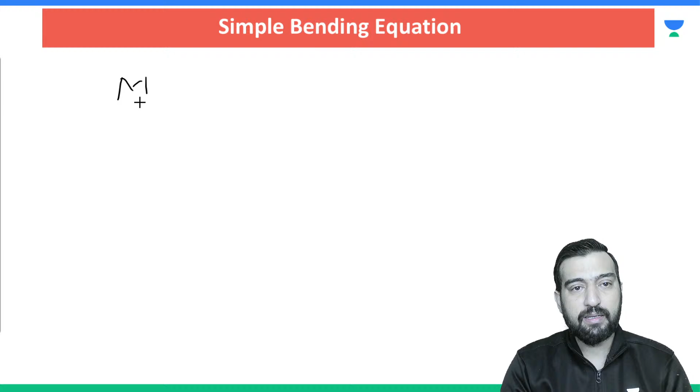We need to figure all this out, but before proceeding further I would like to start with the assumptions involved in this simple bending equation. So shall we?

Let me write down the assumptions once. These assumptions will largely remain valid for torsion as well. Let me write down the assumptions for you guys.

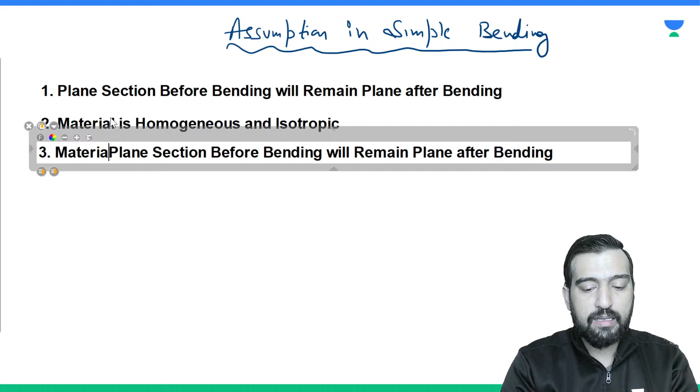Third assumption is that your material is going to obey Hooke's law. Material obeys Hooke's law.

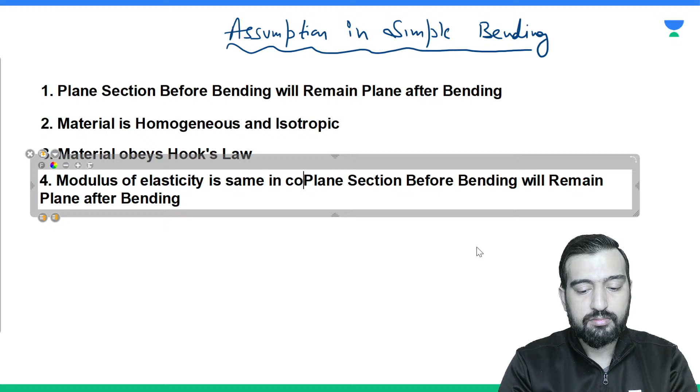Fourth assumption is that material is the same in tension as well as in compression, meaning its Young's modulus is going to be the same in tension as well as compression. So we can say the modulus of elasticity remains the same. Okay, so this is the fourth assumption.

So what is the fifth assumption? That initially the beam is free from initial stresses, or it is initially straight, and the dimensions of the cross sections do not vary along the length of the beam. So let me write it.

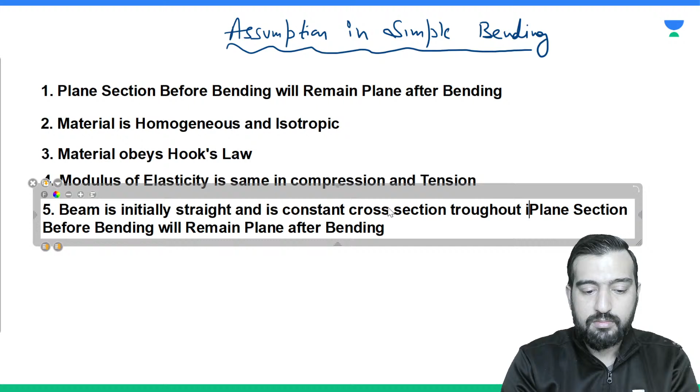And the next assumption is that the plane of loading must contain the principal axis of cross section. This is also the last assumption we can write. Very good morning dear Manjeet, how are you?

Next assumption is that the plane of loading must contain a principal axis of cross section of the beam, and the load must be perpendicular to the longitudinal axis of the beam. Okay, so all these are the assumptions which we are drawing.

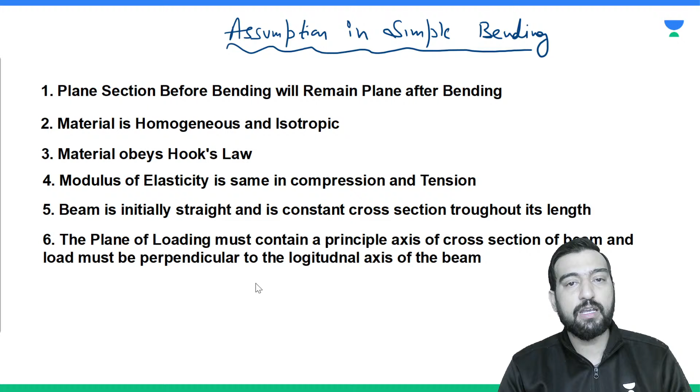Very good morning. Okay, so these are the assumptions we use before the derivation of the simple bending equation. Although I am not going to derive it, we need to understand it and be familiar with all the terminologies. So once again, plane section before bending will remain plane after bending simply means that the strain diagram is linear.

Second assumption is my material is homogeneous and isotropic. It is homogeneous, it is uniform, and it is going to show similar properties in all directions. This is the meaning of homogeneous and isotropic.

Third is that I can work linearly, meaning it obeys Hooke's law, meaning strain and stress are directly proportional. From assumption 1, the strain diagram is linear, and since it obeys Hooke's law, stress is also directly proportional to strain, meaning the stress diagram is also going to be linear. So this is my third assumption, which indirectly says that the stress diagram here is also linear.

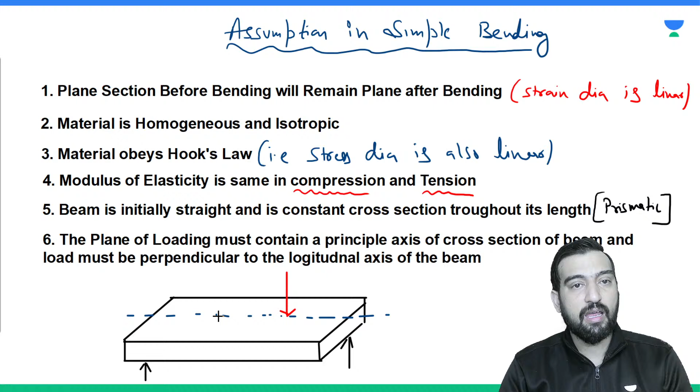So now by keeping these six assumptions in mind, we can derive the simple bending equation. Although once again I am repeating, yes, prismatic section means no changing of area. Manjeet, excellent, yes. But again I am saying I am not going to derive the simple bending equation here. This is the equation which we have to use, which we have to apply, on which we have to do our engineering. And believe me, once again I am saying this equation is literally very important.

Now we need to understand what all are the various terms involved in this simple bending equation: M upon I is equal to sigma by y is equal to E by R. What is M, about which axis it is happening, what is moment of inertia, about which axis we calculate it, where stresses are developed, what is y and from where we measure it, for which material we talk about Young's modulus, for which direction we seek it, and what is this R, this radius of curvature, and what radius actually comes into the picture. So we need to understand this simple bending equation.

So let me explain these six parameters one by one to you. Let's look at these six, one by one. But these assumptions are very important. These assumptions are very important.

Now let me again write down this simple bending equation: M upon I is equal to sigma by y is equal to E by R. If you get the visualization of all the terms of this equation, then the simple bending equation will be nothing for you.

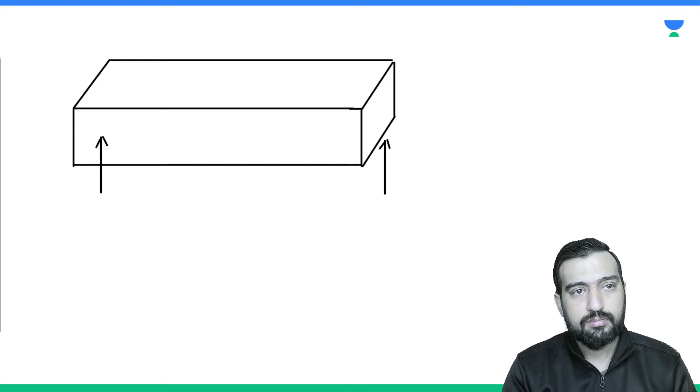Or let's say it is simply supported condition. Now all of you know what is a simply supported condition. Let me draw it over simply supported condition. Okay, let's say this is a support and this is also the support.

And you have to apply load here vertical axis. You can apply load here in two ways. One like this, another like this. Both are going to work well. मतलब कि इसको मैं आपको कैसे समझाऊं कि अगर ये मेरा बीम है तो आप इसमें ऐसे भी लोडिंग लगा सकते हो, ओके, ऐसे भी लोडिंग लगा सकते हो और ऐसे भी लोडिंग लगा सकते हो.

इट कैन बेंड लाइक दिस, है ना, ज्यादा नहीं करूंगा टूट जाएगा वरना. और इट कैन शो यू बेंडिंग लाइक दिस. सो इन बोथ द डायरेक्शन यू कैन शो द लोड, क्योंकि दोनों के कारण बेंडिंग हो रही है. बट यस, इफ यू आर गोइंग टू अप्लाई लोड लाइक दिस, so it is your torque. Due to that, twisting will happen, which is our next topic, and we do not have to consider that here.

Okay, so for bending with respect to this beam, we would be having two possibilities. About this axis it is going to bend like this, about this axis it is going to bend like this. But if you are going to apply load like this, it is simply going to give you compression, and if it is passing through the CG, it is simply going to give you compression or tension. It is not going to participate in bending.

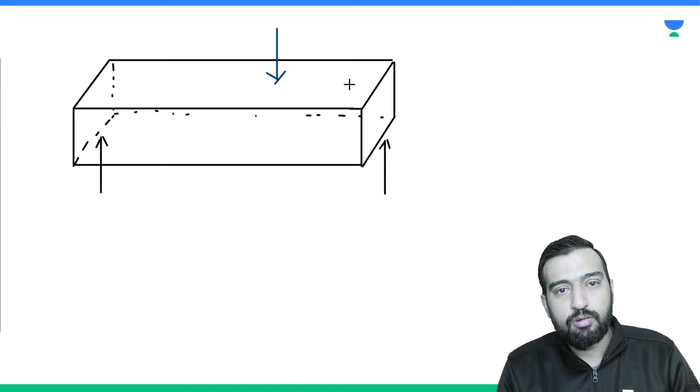Okay, so that is the case. So what can we do? Let me start with this vertical loading. So this loading must be passing through the center line, which contains the loading. It must be passing the center line. Let me say like this. Okay, this is the center line.

And why center line? Because if it is going to deviate from this center line, then along with the bending, it is also going to show you some twisting. For example, if I am going to take a load like this, then due to this eccentricity, instead of bending, it is also going to give you some torque, some twisting moment is also there. Suppose this is P, then P into E is the twisting moment about this axis.

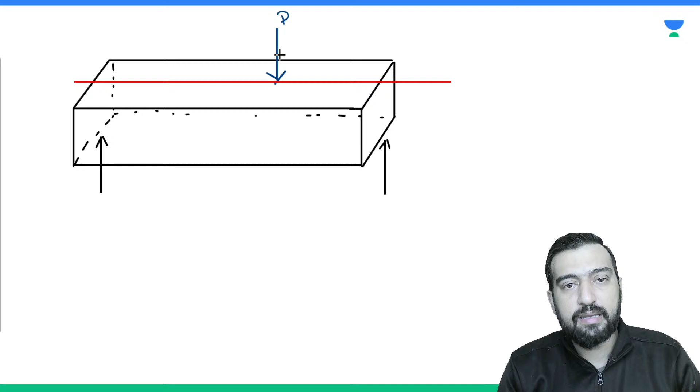So right now we do not want to tackle twisting problem. We only want to tackle bending problem. Okay, only simple bending is involved here. Or simply you can apply bending like this, or either you have to give this or you have to apply some bending, maybe like this, maybe like this. Okay, so due to these loads my dear friend, you can calculate bending moment at any section.

I hope you understand the dimension of this beam. This is the longitudinal axis and this is known as length, and this is the width of your cross section. This is the overall depth of your cross section, and let me make it this line hatched.

The axis which I have shown with the blue, this is known as the neutral axis. You know why it is known as the neutral axis? Because all the rotation of the cross section is going to happen about this axis only. Let me call it axis, let's say ZZ axis. Let me call this axis as ZZ axis.

Okay, and can anybody of you tell me, applied load only has to be perpendicular? No, it is not necessarily perpendicular, it can also be inclined. It can be like this, Manjeet. Yes, ऐसा भी हो सकता है. But we have to make sure due to this load, its plane containing in this red plane only. If it is deviating from this plane, then it is going to show you twisting. मीन्स आप इसको देखो, इसको ऐसे समझो. मैं आपको ये जैसे बीम बना के दिखा रहा हूं, लिसन टू मी.

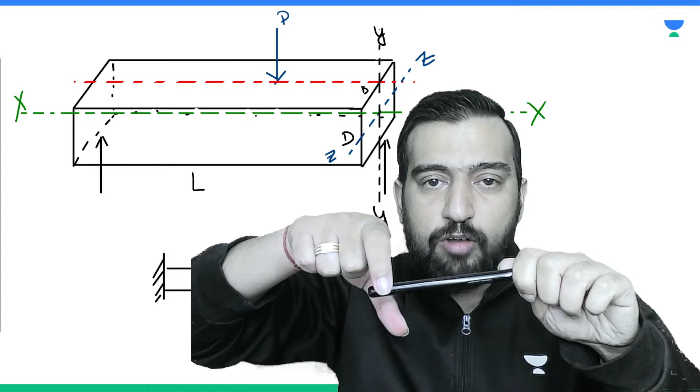Suppose this pen direction is z direction. If I am going to apply moment like this, I will say yes, the moment is about z axis.

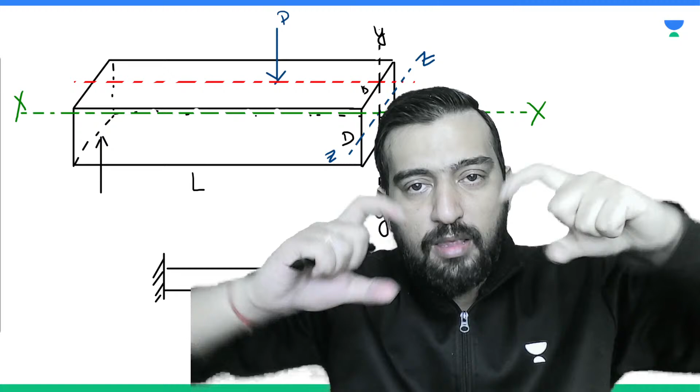So in both of these cases, which are known as sagging and hogging, as we have seen yesterday, this moment we are going to apply about the z axis.

About which axis is the bending happening? Which axis is it? Dear, it is the z axis.

Yes dear, yes, Ashraf is again right. Yeah, it is about z axis. That's why we take summation of Mz equal to 0 to calculate the reaction exactly. In all the planar structures, we take summation of Mz equal to 0.

So it is z axis. The very first thing which we have learned just now is that this moment, with respect to this diagram, I am saying with respect to this diagram, this moment m is moment about z axis.

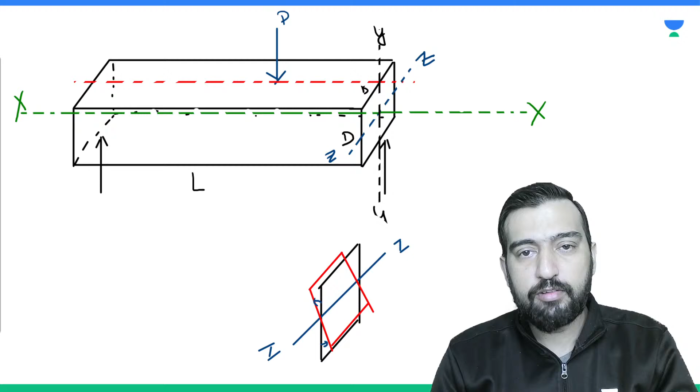So ultimately, if this plate is rotating, let's say this is a plate and this is the axis. If this plate is rotating about this axis, then I have to say that it is the moment of inertia about this axis, which is perpendicular to this whiteboard. Okay, so this will be here, so it is again Z axis, it is again Z axis dear, let me write it.

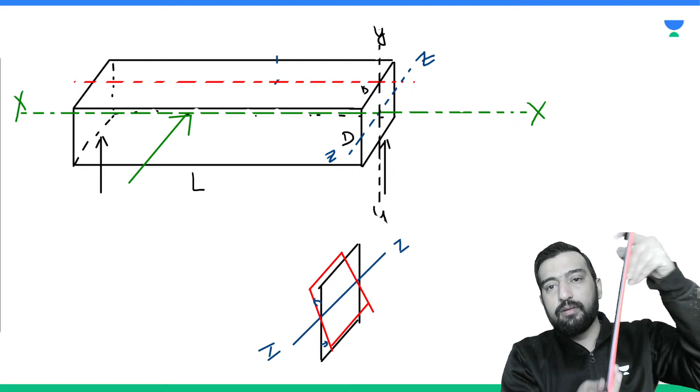Okay, great. And moment of inertia. Now it will be rotating like this about this vertical axis, and this vertical axis is Y axis. It will be rotating like this. Are you getting the point or not? Tell me, guys, are you getting the point or not? All of you tell me.

Yes, here Manjeet has given us an important point. He said, sir, always take the axis which is perpendicular to the load. But it's easy to say this in words, it is not practical. I am taking load in the Y-axis, okay, but both the axes are perpendicular - Z-axis is also perpendicular to Y-axis, and X-axis is also perpendicular to Y-axis.

So first of all, we need to do this simple exercise which I just made you do. Then you can draw up to this conclusion that yes, exactly guys, exactly. Now you have understood, no problem, my tension is over. Okay, so this is the case here, this is my original case. Okay, now next parameter, so these two things you have understood.

I hope you all know what is this IZZ. Everyone must know how to find IZZ. What is IZZ here? In this case, what is IZZ? If this is B, this is D, then it is BD cube by 12, it is BD cube by 12. And had it been a case of the earlier one, the green load one, then it is DB cube by 12.

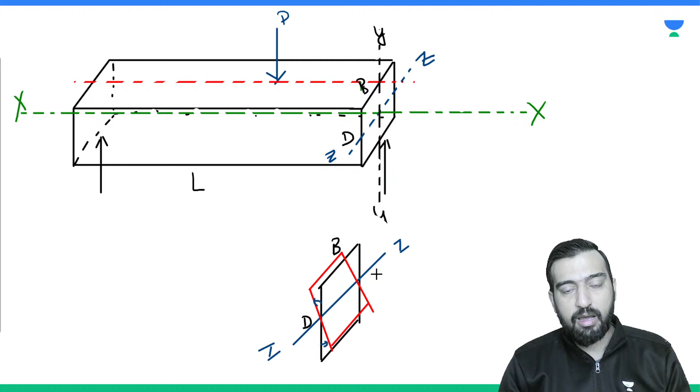Next comes sigma. What is sigma? Here you can see that although it is the outermost fiber, it has free rotation. But if I take any interior fiber, their strains are restrained. And if strains are restrained, then correspondingly stresses will be developed. So if I draw any cross section from inside, let's say this is my cross section.

Let me draw it here again. This is the z-axis, and if I draw this cross section again here, it looks like this. This is D.

And how it is going to act, you can see. Where do you think the stresses would be more? At the top fiber, at the neutral axis, at the bottommost fiber, or at any intermediate point between the neutral axis and extreme fibers? Tell me where the value of stress generated due to bending would be more.

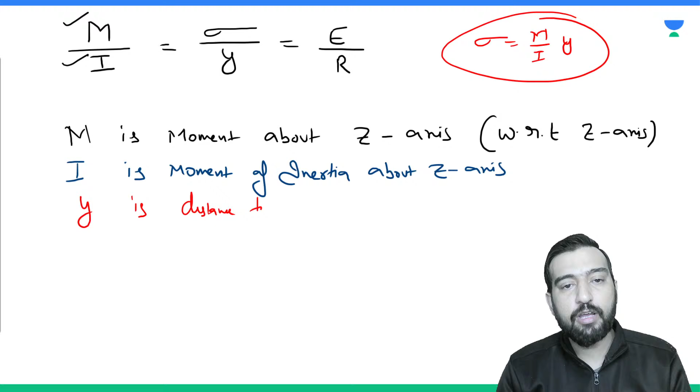So y is distance from the neutral axis, let me write it here: y is distance to the fiber from the neutral axis where we need to find bending stress, and sigma is simply the bending stress. Stress is developed due to bending moment, or you can say the stress function for sigma is M. So this is bending stress.

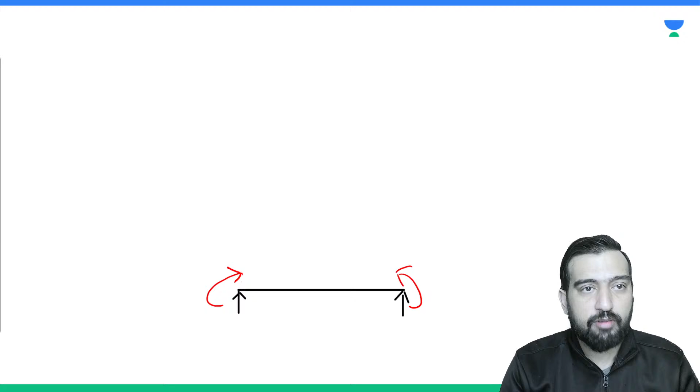It is going to show some elastic curve. What is the shape of this elastic curve? Is it parabolic, circular, or hyperbolic?

No dear, it is not parabolic. It depends upon the type of load. In the simple bending equation, I can add one more assumption: the equation is for pure bending, meaning only bending moment is developed. Although we use this equation even in cases of non-pure bending, originally this equation is derived for pure bending. So if it is a case of pure bending, what is happening?

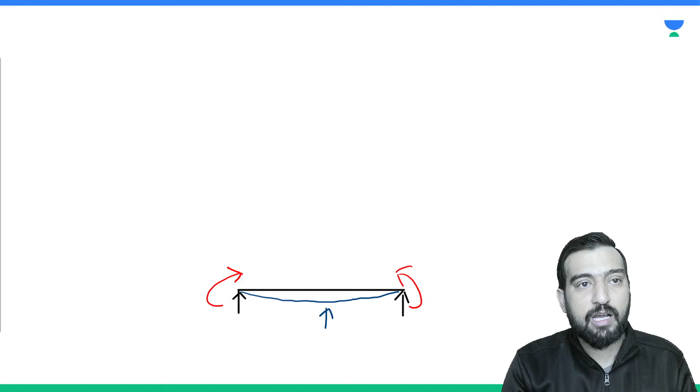Then this curve comes out to be circular. I will tell you why this is circular. Because we know that M upon I is equal to E by R. This R is the radius of curvature. If this is my center, then this is the value of R. R is the radius of curvature. And you can see, if bending moment is constant...

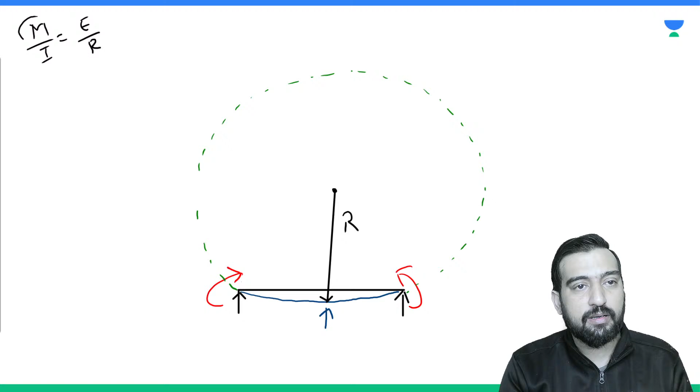Then what is R? R is E, I upon M. For a prismatic beam, I is constant. Young's modulus, same material, E is constant, and in case of pure bending, the bending moment is not going to change, so M is also constant, hence R is also going to be constant. And if R, the radius of curvature, is constant, it can happen only in a circle.

So in case of pure bending, we take the elastic curve as an arc of a circle. You can make a note: in case of pure bending, the radius of curvature is constant, that's why the elastic curve is taken as the arc of a circle.

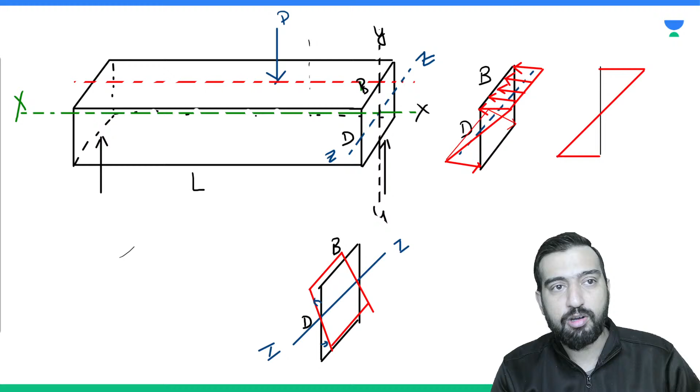So this is the case here. This is the bending equation, simple bending equation, and you know how to calculate this normal stress, how to calculate the bending stresses, how to write the bending moment equations. We have already seen that.

And now after this bending equation we introduce one more term which is known as section modulus. Anybody, what is section modulus?

Actually sigma is coming out to be M upon I into y. So for extreme condition, this y tends to y max, M upon I into y max. And here you can see that sigma is M upon I over y max. So this is known as z, and it is defined as I upon y max. Y max is nothing but the maximum distance to the neutral axis.

This geometric property of the beam which defines the strength is known as the beam section or section modulus. Yes, so this z is I upon y.

You can see that M is directly proportional to z. M is equal to sigma into I by y max, so it is z. So if z is more, then the moment carrying capacity of the section is more. Ultimately section modulus is the tool in bending which can do the comparison due to bending moment.

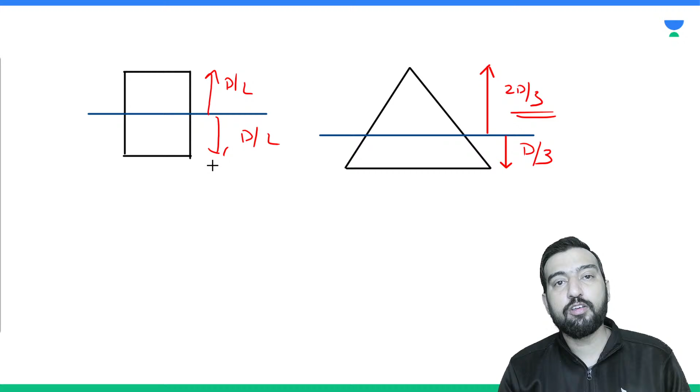So as Ashraf said, it is the geometric property of the beam which defines the strength of the beam, but we could add one more word here: in bending. Z more means the beam is more strong in bending. So whenever we have to compare the beam moment carrying capacity of the section, we can directly find out the Z value of the different sections. The section which has more Z is capable of taking more bending moment with less deformation. Are you getting the point or not?

For example, let me give you the section modulus of some standard geometries. What will be the section modulus of a circle? Let's suppose the diameter of the circle is d. So what is the section modulus? Z is equal to pi d cube by 64 divided by d by 2, which becomes pi d cube by 32, and it is area into d by 8.

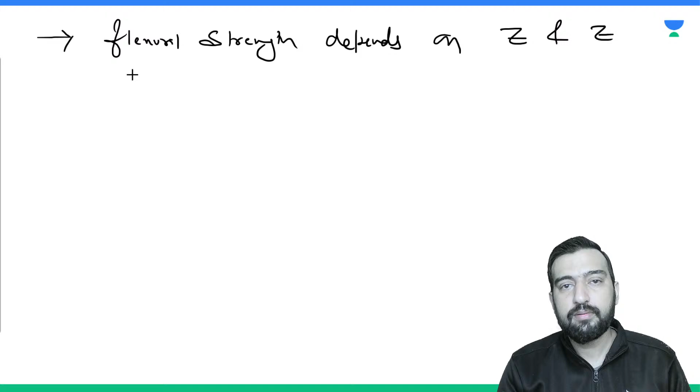Okay, so what I want to conclude is that flexural strength depends upon Z, and Z again depends on moment of inertia. Is it clear or not? So we can say how the I value is going to be more.

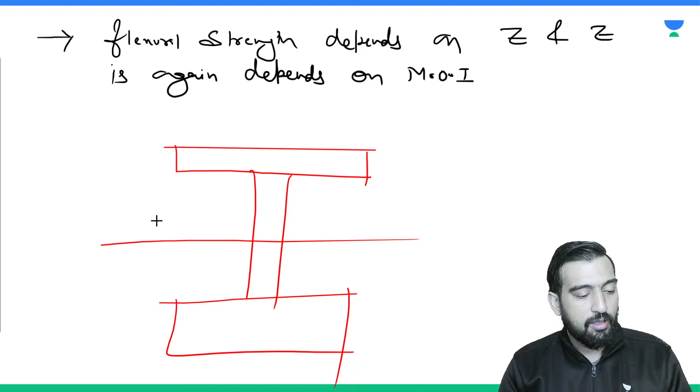So we can conclude from here that for a given y, Z is more if I is more, and I is more if more area is located away from the neutral axis. That's why we can say indirectly it is the moment of inertia only which is defining the strength of the beam in flexure, the strength of the beam in bending. Are you getting the point or not? Everybody tell me, are you getting the point or not?

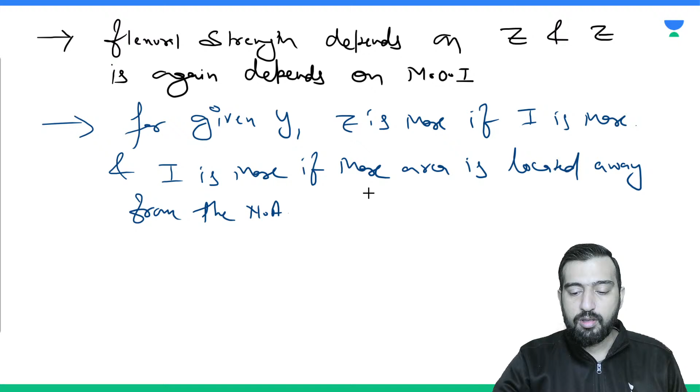Okay dear, so now we can move on to, based on this concept, a small numerical. This numerical is an objective question for you guys. I hope you all will attempt this.

A beam with the given cross section is subjected to a positive bending moment causing compression at top, of 16 kilonewton meter acting around the horizontal axis. What is the tensile force acting on the hatched area? Let me draw it. So tell me the value of tensile force acting in the hatched area.

Okay, so this is the uniform section, and you can say that this is the neutral axis. So just tell me the value of tensile force which would be resisted by this hatched area here. Tell me.

So first of all, we can draw the stress diagram for this. What is the stress diagram? What is the value of this extreme stress? Let me know.

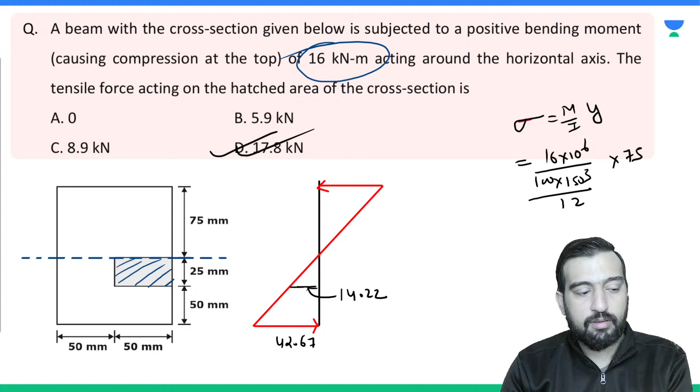So this is about bending, although you can also see some standard results like tapered beam and all, but they are not very much required. So all these things were needed for building your concepts. I hope this theory of bending, theory of pure bending, is quite clear to you.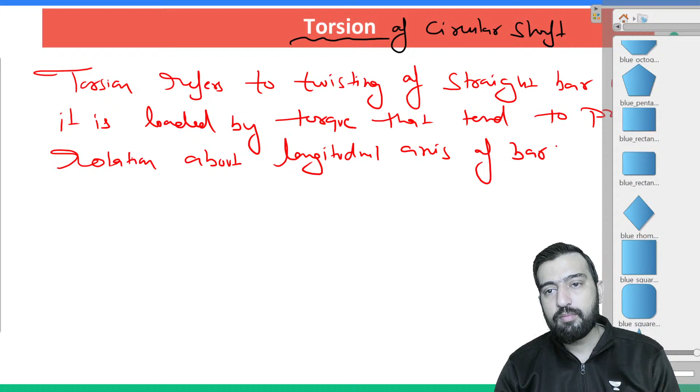It is just like, suppose we do have some shaft, maybe like this. Let's suppose this is a shaft.

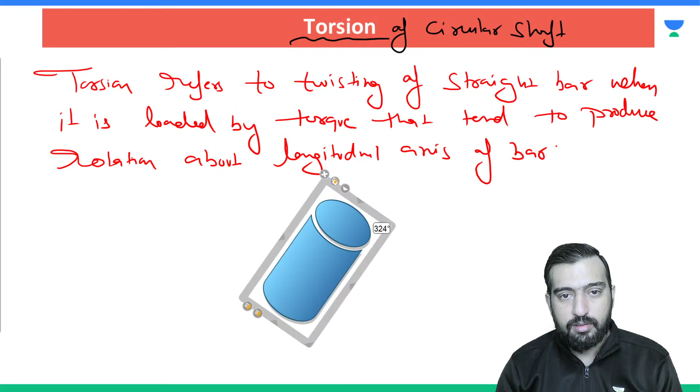So you can see, suppose if this end is fixed, and you are going to apply some twisting moment here.

So what would happen about this longitudinal axis? This is your longitudinal axis, and this time this longitudinal axis is going to work as the neutral axis. So this is going to be the angle, this is the axis of shaft, and these cross sections, let's say it is A, B, C, D.

These points on the cross sections are going to move. A will come somewhere here, B will come somewhere here, C will come somewhere here, D will come somewhere here. So they will be going like this. If this is A, B, C, D before twisting, after the application of torque, this is the initial scenario, and after twisting the scenario is going to be like this.

A will be rotated by theta, then B, C, D will also be rotated by theta. So you can consider all of these angles same. This is A dash, revised position of A. This is revised position of B, revised position of C, revised position of D. So they all can move. Are you getting the point or not?

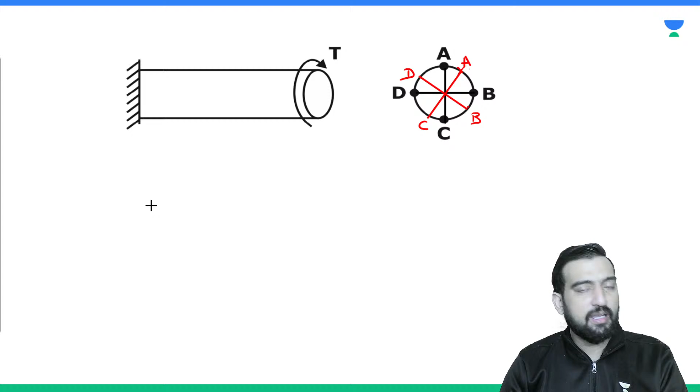Okay, so that is the case. So this is known as the torque. And what is pure torsion? When your section is only subjected to torque and no bending, no axial, nothing else is happening, then the situation is known as pure torsion.

So pure torsion refers to only twisting moment or torque to shaft. Are you getting the point? It is not accompanied by neither axial force nor bending moment.

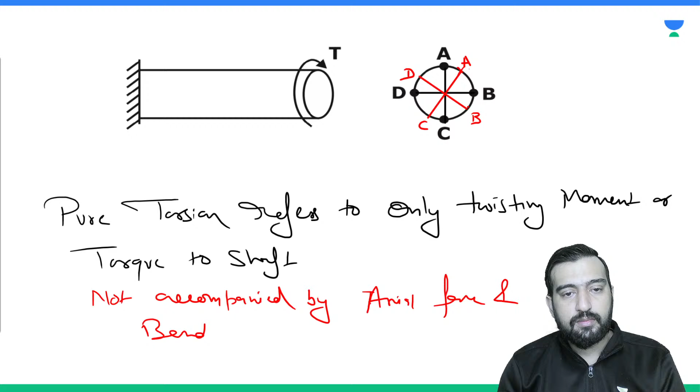So write it down here: not accompanied by axial force and bending moment. Okay, are you getting the point or not?

So the simple torsional equation which we are going to use is this much. You can see its resemblance with the simple bending equation. They are very much resembled. Okay, so minor distinctions are there that I am going to tell you in the meanwhile.

So simple bending we just have seen, it is M upon I, it is sigma by y, is equal to E by R. So torsional formula you can see, it is T upon I. T is going to happen about the longitudinal axis, let's say it is Tx. I is also about the longitudinal axis, with respect to diagram.

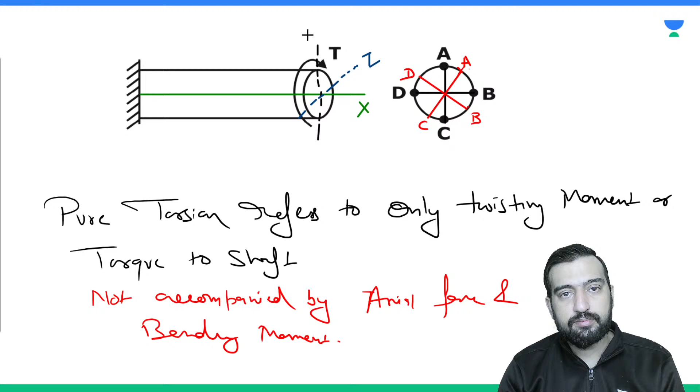What is longitudinal axis? Let me call this axis as longitudinal axis, it is x. Okay let's say it is y. Here the y and z are symmetrical. Let's say this is z, this is y, this is x. So this is the scenario here.

So T upon I is equal to tau by R is equal to G phi by L. Okay, Tx is torsional moment about x-axis. Ix is also known as Ip, or in some references it is written as J. It is known as polar moment of inertia. Generally we use a perpendicular axis theorem to calculate polar moment of inertia if it is not a standard case.

Now, like we had in simple bending equation sigma, which is the bending stress due to the bending moment, similarly here tau is known as the shear stress. It is the stress developed due to the torsional moment, due to the twisting. So it is shear stress due to the twisting.

Like we had y as the distance from the neutral axis, similarly r is also the distance from the neutral axis, or you can say it can be any local radius where we are interested in finding the shear stress. As we have same stresses at the same y, similarly we are also going to have same kind of normal shear stresses at a constant r. Means a cross section, the outer fibers in circular cross section are going to have same sort of stresses. Then again this circle is a locus of points where you can find the same sort of shear stresses. Okay, so same R means same stress, like we used to calculate same Y means same normal stress.

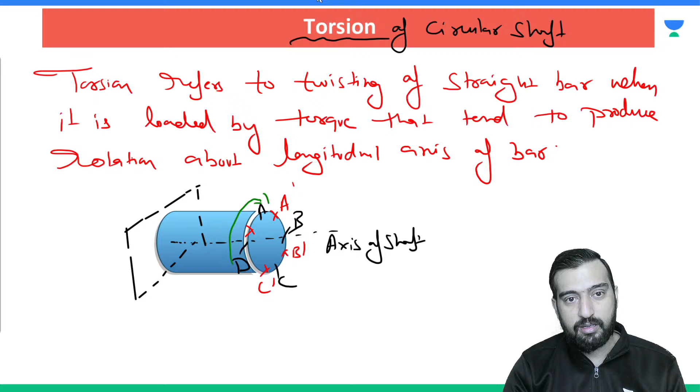This is also important to understand. We cannot define the degree of torsion only on the basis of phi. It is actually how much phi is happening with respect to the longitudinal line. That is only going to give you the relativeness of torque. Suppose I can have two bars, let's suppose this is my bar number 1 and let's suppose this is my bar number 2.

This is my bar number 2. So you cannot say now that in bar number 2 the angle would be this much, and if bar number 1 angle would be this much, then more torque would be here. It is depending upon how much this angle is there with respect to length. Let me be more specific, let me keep the cross section even same, then you can understand it in a better way. Let me draw two figures one more time.

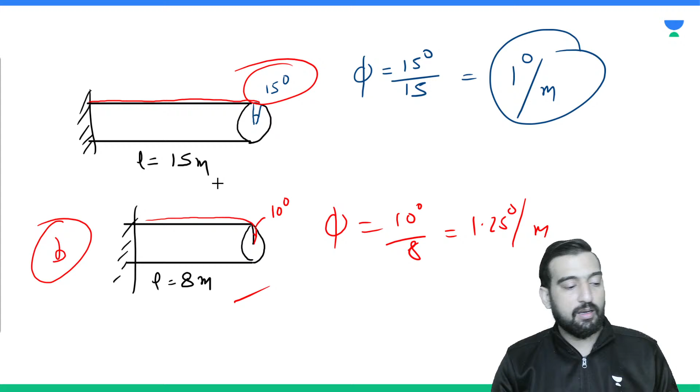It depends upon phi per unit length, like phi per unit length. That's why we have seen phi by L. G is shear modulus and phi by L is angle of twist per unit length, per unit longitudinal length. Let me write these as well: it is shear modulus or modulus of rigidity, and phi by L is angle of twist per unit length, the angle of twist per unit length here.

So please let me know if you guys are having any doubt. Most of the assumptions are same in torsion as we used to have in simple bending equation. If you want me to write the assumptions, then quickly I can write it for you guys. So, assumptions involved in torsional theory.

The first one: plane section before torsion will remain plane after torsion, or you can say that circular section is going to remain circular only, like we used to have plane section before bending will remain plane after bending in simple bending equation. So here it is: circular section remains circular.

Okay, what else anybody? What else can it be? Section is not going to warp, section is not going to warp. I hope you all understand what is warp. What is warping actually? What is warping? Anybody?

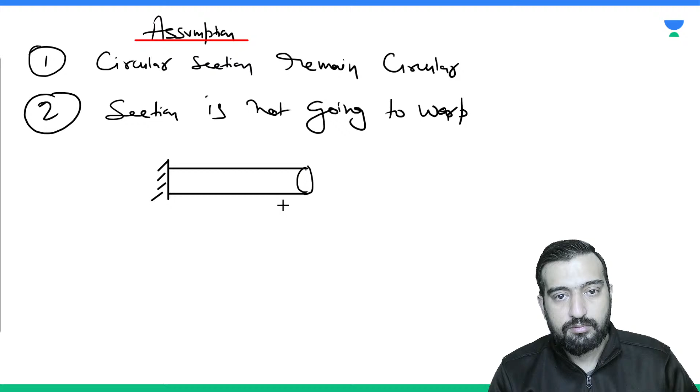So due to this, what will happen: this is a plane and it's going to remain plane even after the torsion. It is not going to happen that if a plane contains A here, B here, C here, and the next time whenever you are drawing a revised plane after torsion, A, B, C are not lying on the same plane. If the longitudinal displacement is happening between A, B and C, along the longitudinal axis, in such a manner that A, B, C are not in the revised plane now, then the section is subjected to warping, which is very much common in non-symmetrical sections like even triangular or rectangular shaft and all. So section is not going to warp, this is again an assumption here.

After this, you can say that the shaft is loaded by twisting couple. Shaft is loaded by torque only, meaning it is not going to be accompanied by axial force or bending moment, so we can handle only torque at a time. Although the methods are there by which we can convert bending and torque into an equivalent manner.

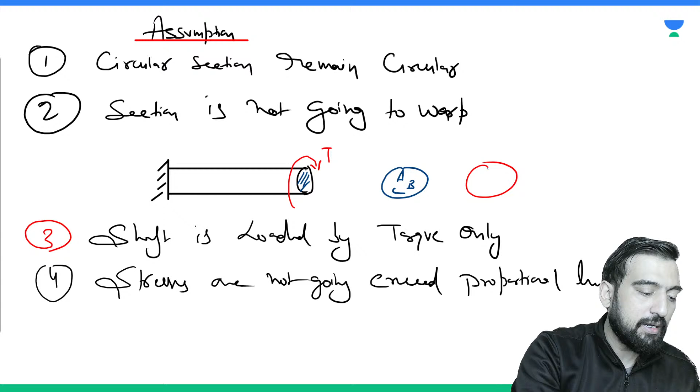So polar moment of inertia, how we can calculate this, is the basic portion of the mechanics. After that you simply have to use this simple torque equation or simple torsion equation in order to calculate the shear stresses at any section. But one thing I would like to show you is how these shear stresses are going to work. Suppose we have a section like this. Please try to understand this. Let's suppose this is a section.

Okay, and suppose this is a center, and I'm showing it like this.

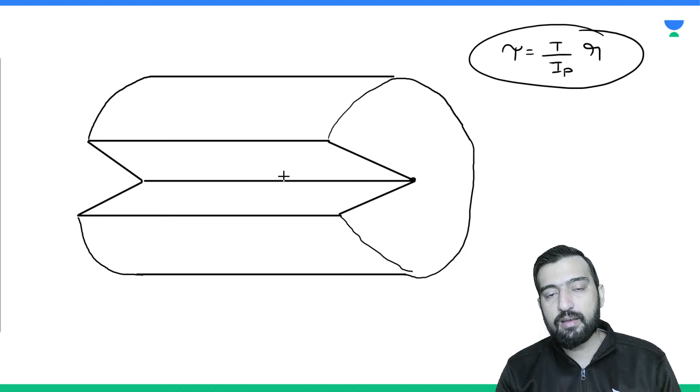So this is the case. Now if this is located at a distance r and this is located at a distance r, so how shear stress is varying? We know that tau is equal to T upon J, or IP into R. So for a section, torque is constant, polar moment of inertia is also constant. So we can say that this stress is directly proportional to R. So as we are going away from the neutral axis, as we are going away from the center, the value of shear stress is increasing, and it is increasing like this. Let me use red color for this, so it is going to increase like this.

But shear is happening. You know about shear stress, we saw it yesterday, that they act equal and opposite on mutually perpendicular planes. If one plane is going to have tendency of going in the clockwise direction, then just to maintain the moment equilibrium, the other side is going to show you the anti-clockwise direction. So this one is going to be

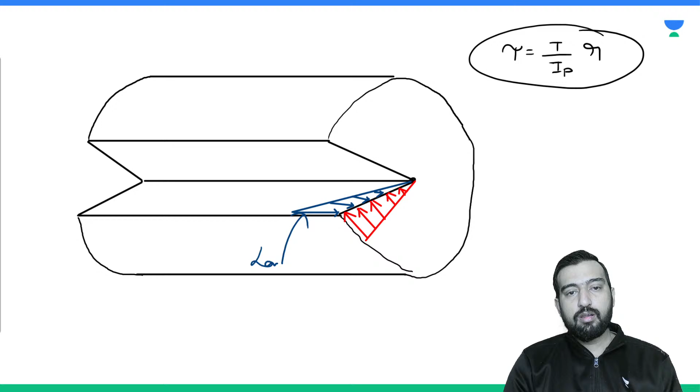like this. So this one is the longitudinal stress. This one is the longitudinal shear stress, this one is the longitudinal shear stress, and this one is the transverse shear stress. This one is the transverse shear stress.

Are you getting the point or not? Okay, so they are linear not only across the cross section, they are also linear in the longitudinal shear stress. Then only the moment equilibrium would be maintained, then only the moment equilibrium would be obtained, my dear friends. Are you getting the point? So like that, we can show you the shear stress variation due to torque.

Okay, please remember, only in case of torsion of a circular shaft, this shear stress distribution is coming out to be linear as you are going away from the center line or neutral axis. But when we will be discussing shear stress due to the vertical force or due to the transverse force, there the nature of shear stress distribution will be different. Here it is linear, and there it can become parabolic. Okay, so don't be confused. Due to torque, its distribution is linear. Due to transverse force, which we have to see further, it is going to be parabolic in nature. Okay, so don't be confused here.

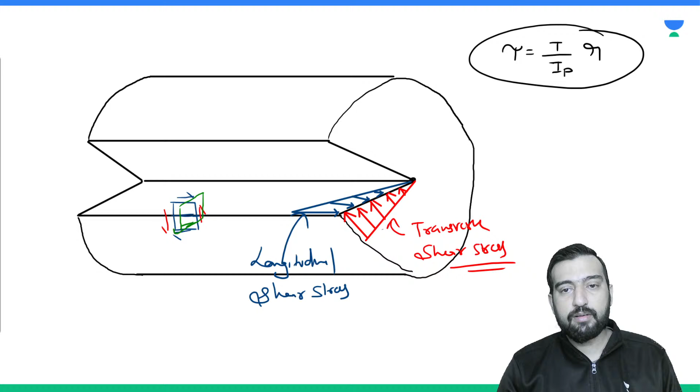Okay, so let's start connections of bars. Before starting this, I want to introduce the sign convention. For sign convention, we are going to use the right hand thumb rule. It's very simple: if torque is going like this, so my thumb is outside, so I am going to show about axis this kind of torque towards the right hand side. If the torque is like this, my thumb is toward this side, so I am going to show torque like this here.

Okay, if I use the same convention, then similar results would be obtained as we had in an axially loaded member. That outward axial load you can take as tensile positive, and inward you can take as compressive or negative. So there, A and E were going to play a role. Here, G and IP are going to play a role. There, AE was giving the idea about axial stiffness. Here, G and J are going to deal with it. Okay, so what is going to happen now? Let's see.

So first of all, we can say that this is the bar in series. Suppose if I want to draw this segment again, then this is one portion, consider it circular, and this is the second portion, and this is the third portion. In fact, there are two segments. B to C is different and C to D is again different. And this is your third point.

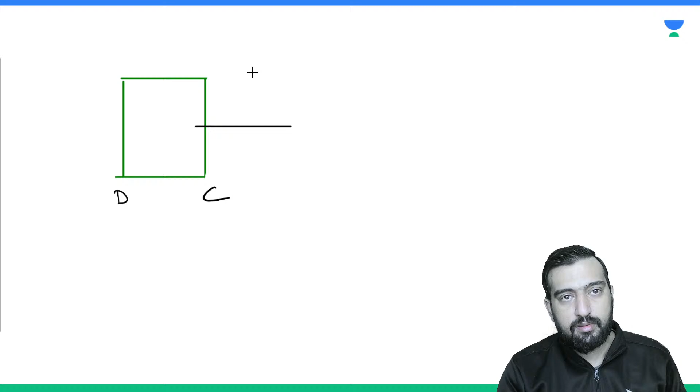Next is this is your AB, this is your BC. Now on the next page I am trying to draw DC. So how is DC going to vary? Simply you can see TA is going out, TB is coming in, TC is coming in. So it would be like this. TB and TC are coming in, but TA is going out. So like this I can show, from the equilibrium point of view. It is TB plus TC minus TA.

Okay, now the last segment is DE. If I draw DE, it will be like this.

And here you can also have one torsion equilibrium equation. You know the torque which is coming at E is equivalent to TE. So you can also say that your TE is also equal to TB plus TC minus TA. This is one equation.

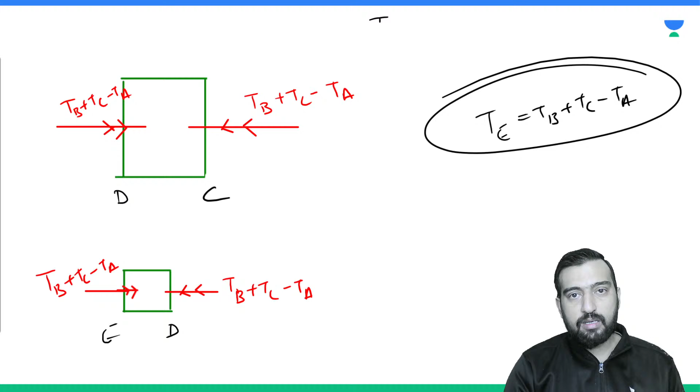It is subjected to TA L upon GJ1. This is the way of calculating theta. We know that T upon J or IP is equal to G theta by L. So theta is what? It is TL upon GJ, J of this section, IP of this, L of this, T on this.

What is T? TA. Whenever you are computing the same for theta B to C, what can you write? It is due to, in place of T you have to write TB minus TA, L is of length BC, J of the cross section cut between B and C. So it will happen like this. Same you can use it as an equation.

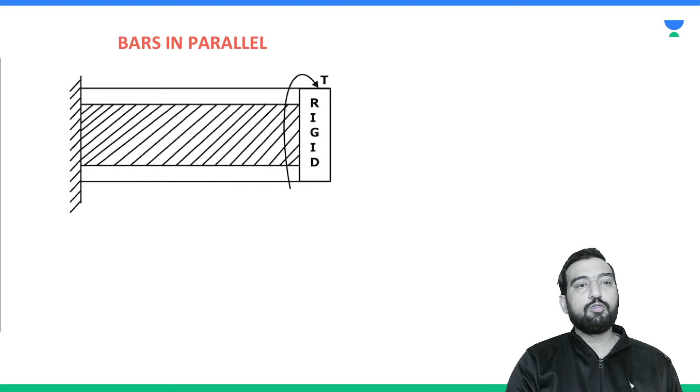And what is the thing which is common when the bars are in parallel? Suppose I do have two bars here, this is the outer tube, this is the inner tube. So what all are the things which are common here? Anybody?

Bars in parallel: the total applied torque distributes into two members. Suppose this is member number 1, this is member number 2. The total torque is equal to T1 plus T2. The common thing here is that the angle of twist theta is same for both materials at a cross section. So this you can use as a compatibility condition.

You know what theta 1 is? It is T1 L1 upon GJ1 or GIP1, whichever you need to use. Similarly theta 2 is T2 L2 upon G2 J2. Generally in parallels the lengths are same. If you know the G and the dimensions of the material, you can calculate the polar moment of inertia, and accordingly you can calculate these values.

GJ is torsional rigidity, and AG is shear rigidity. EI is flexural rigidity, as we studied earlier. AE is your axial rigidity. So all these are the various rigidities. Four types of rigidities exist which you need to know in strength of materials: one for shear, one for indirect shear which is torsion, one for axial, and another for indirect axial which is bending.

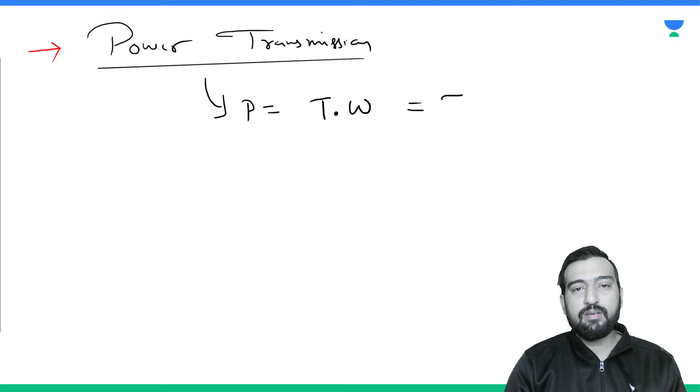So similarly we can define power transmission for something rotating with angular speed omega, but here the speed must be constant. Then power transmission is given by the dot product of torque and omega, simply T into omega. Why am I writing simply T into omega instead of dot product? Because angular velocity's direction is always parallel. So T into omega is going to give you the power.

Omega generally is in revolutions per minute or per second, you need to calculate it. T is the torque. So we can use it like this.

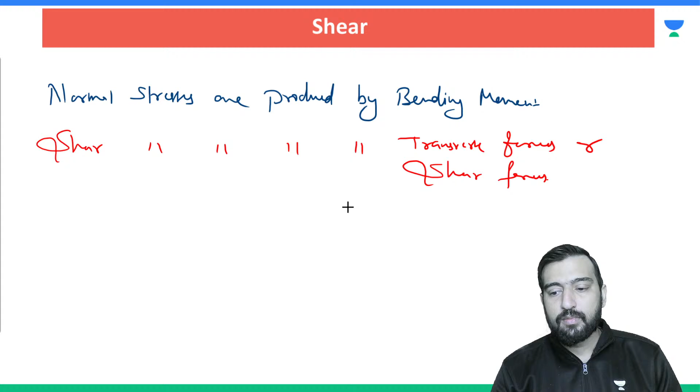So dear, how we can write the shear? For that we do have one general equation. Suppose if we have any rectangular beam, and I drew the cross section of this rectangular beam, and if I want to see at a distance y how much shear stress is being produced, we have an equation for that. That equation is tau. We need to understand what V is, what I is, what B is, what A is, what y bar is.

V is shear force. At whichever section you are doing the shear stress analysis, suppose I cut a section here, the resultant vertical force acting there is the shear force V. I is the moment of inertia about the neutral axis of the entire section. B is the width of the section, like this is the width of the section.

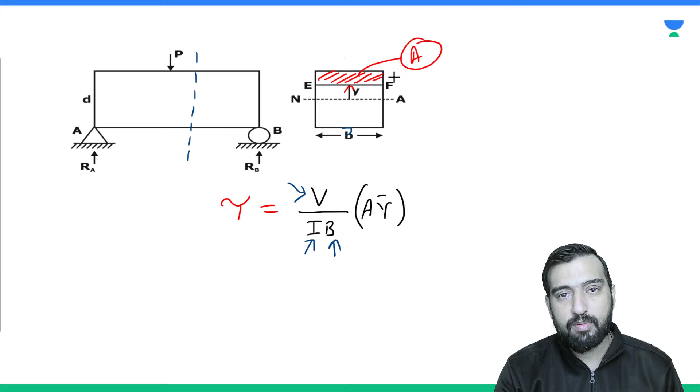Shear stress at any point P at distance y from neutral axis is given by tau, or Q in some books, and this is V over IB into A y bar, where V is the shear force at the section, and A into y bar is the moment of the shaded area. Here this is the shaded area, the red one, about the neutral axis.

I is the moment of inertia, and A into y bar, A is the area of cross section above EF till the free surface, till the outermost fiber, and y bar is the distance of centroid of area A from the neutral axis. I is again the moment of inertia about the neutral axis, and B is known as the width of the section where we need to find the shear stress.

In rectangular beam, I beam, generally widths are not varying, but these widths continuously vary in case of circular section, in case of triangular section. So in all such sections your widths continuously varies.

So let me draw it and show you for the rectangular case if we are dealing with it. So tau is written as V over IB into A y bar. So what is A? For the same cross section, if I draw it, this is b, this is d, this is the neutral axis.

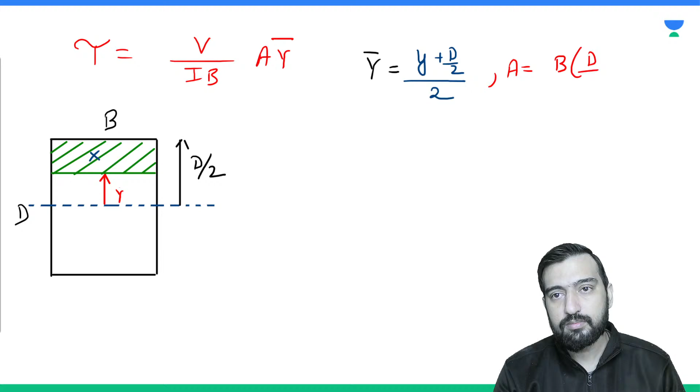Okay, so if I want to collectively obtain the value of Ay bar, it is b into d by 2 minus y into d by 2 plus y by 2. So it is coming out to be b by 2 into d square by 4 minus y square.

So now if I want to write the equation of shear stress, it is V Ay bar over I b, you can also write it like this. Ay bar we have already calculated. So it becomes 6V upon b d cube, times d square by 4 minus y square. So this is the mother equation for rectangular beam, and it will be used for plotting the shear stress distribution.

As you can see here, the degree of y is 2, so this variation is going to be parabolic in nature. The variation will be parabolic. So if I want to plot this function...

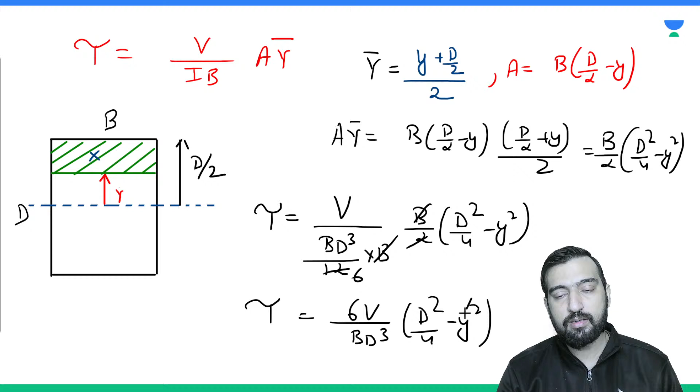If I want to plot this function, you can see at y equal to 0, that is at the neutral axis, the value is 3 by 2 V over bd. And at extreme fibers when y is equal to d by 2, y square will be d square by 4, it will be cancelled. So shear stress distribution at the topmost and bottommost fiber due to shear force comes out to be 0, and it increases till the neutral axis, then again starts decreasing.

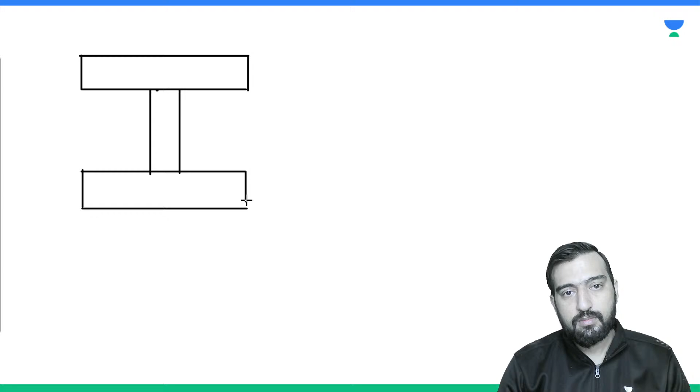This is the neutral axis.

So how is it going to vary? Anybody? So it is increasing.

See, one thing you need to understand, here you will identify all the patterns yourself. In shear stress distribution, this is V A y bar over I into B. So this B, keep it in mind.

From here to here, from just top of this line to just bottom of this line, area into y bar is constant, V is constant, I is also constant because I is of the whole cross section. The one thing which is suddenly changing from just bottom of this flange to just top of the web is the width. Width is suddenly decreasing, so if denominator is suddenly decreasing, then the fraction is suddenly increasing.

So the basic nature here is parabolic. But the moment you are jumping from flange to web, due to the instantaneous decrement in the width, this will be rapidly increasing, and again it is going to follow the parabolic fashion. After the neutral axis it will be decreasing in parabolic fashion, and from this point to this point again there is sudden increment in the width.

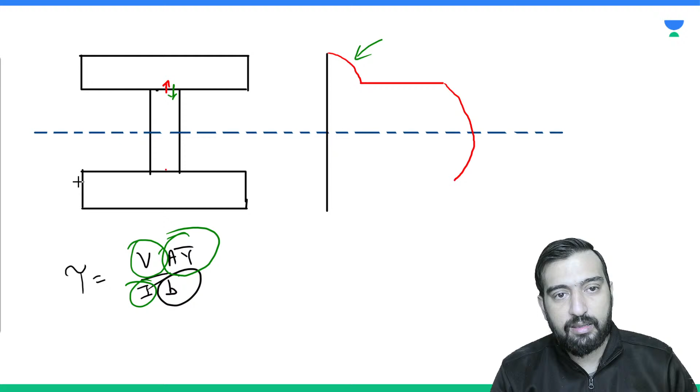If there is sudden increment in the width, what is happening? Sudden drop. This is your sudden drop here. After that, it will again be parabolic. So here, this is also parabolic.

And I also gave you the reason of this sudden jump. If width decreases, shear stress suddenly increases. If width suddenly increases, then shear stress again suddenly decreases.

So one thing you can look at here is that from a bending point of view, those sections are good where more mass is located away from the neutral axis, like I section, T section. But for shear point of view, as you can see, most of the shear stresses are generating near the neutral axis. So those sections would be preferred where more area is accumulated surrounding the neutral axis. As you go away from the neutral axis, the shear stress intensity is already decreasing. So the nature of sections for bending and shear are opposite. Bending needs more area at more distance from the neutral axis. Shear means you need more area near the neutral axis. So this is a prime difference between shear stress and bending stress.

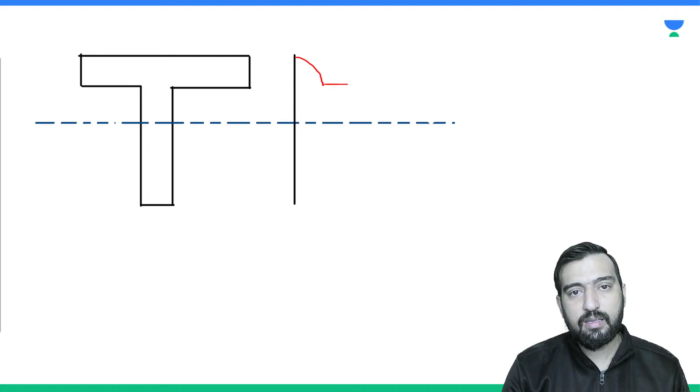If this is your T section, then somewhere here would be the neutral axis. So if somewhere here would be the neutral axis, the variation diagram is going to be like this: it will be increasing, with sudden decrement in the width. Okay, this is the pattern for T section.

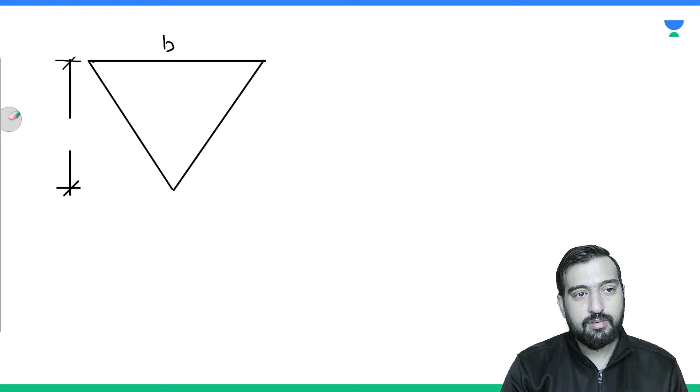Okay, for the triangle, can you tell what is the shear stress distribution for a triangular section? Suppose if this is B, suppose if this is H, how can you find the shear stress distribution?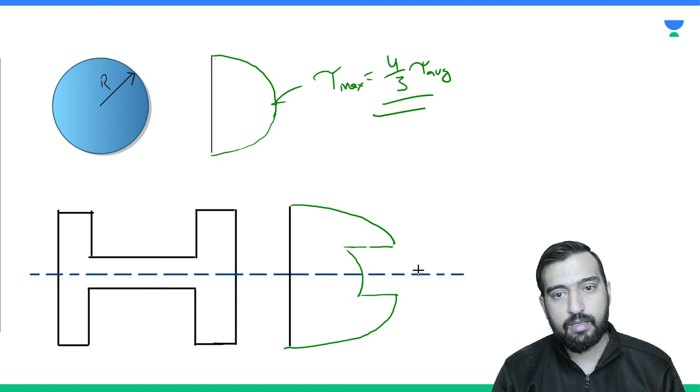Okay, so this is your neutral axis. Here the distribution is like - see what's happening at center height? At center height, the net width is low here, and at center height suddenly the net width increased. So initially the diagram that forms would be like this, but suddenly when there is increment in the depth, then a drop would be there, and for incremented length this is the shape. So it becomes quite symmetrical. It might not look very symmetrical but it is very much symmetrical.

For plus section as well, the results are ditto same. Ditto means if you are keeping the dimensions in proportion.

Okay, so all these are the important shapes of shear stress distribution. It doesn't matter whether you are working with an H section, plus section, or circular section - they are going to happen like this.

So this is about shear stress distribution. Let me revise one more time. This is the basic equation to analyze shear stress: V upon I, into AY bar. I showed you a simple case of a rectangle, how the value of AY bar can be calculated, what is B - here B was kept constant, but in case of circle and triangle this B will be varying. V is the shear force, I is the moment of inertia, and B is the width of the section.